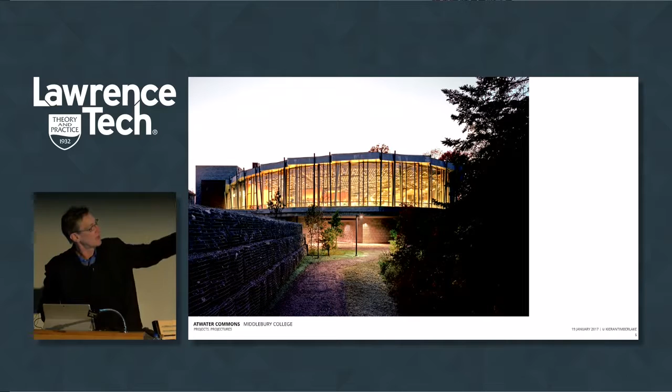For instance, this dining hall, this collective of two residence halls and a dining hall at Middlebury College, was formed around the question of how a new aesthetic can reinforce campus architectural traditions and frame views of the campus and the grandeur of the mountains. This dining hall sits on a podium, engaged in a hillside with the residence halls behind it, but sits almost like a tree house into the trees, looking at the mountains beyond. These gabion walls, wire cages filled with rock, are part of the excavation of nesting this building into the hillside. We took that rock and created a sound wall that is now ivy-grown and merged back into the landscape, adjacent to the building.

How can we conceive a residential complex that builds community while serving as a model for environmentally responsible student housing? This project at UCSD in San Diego, part of the University of California system, incorporates both natural ventilation and high building performance to achieve LEED Platinum housing on that campus.

And these hallways along the outside edge are outside. You can't do that in Michigan very well, but in California you can, and you can see the Pacific Ocean from some of those prospects.

And then when you get into the rooms, the rooms are loft-like, they're adaptable, and they have abundant natural light and are knitted both to the campus and to the landscape.

At Cornell, one of the questions was, how can architecture unite academic and residential life? There are a series of finger-like buildings that travel down the hillside, allowing the landscape to move through the buildings.

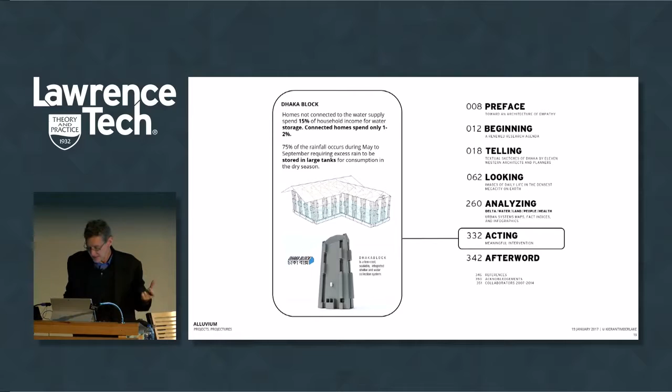And the other critical fact is that half the time of the year, half of Bangladesh is underwater, either from the north, from the alluvial flow coming down from the mountains and the snow melt, or from tidal flow from cyclones being pushed up the Bay of Bengal, flooding the lower half of the country. So there's constant turmoil of where one lives and how one lives, intense poverty.

And a country that, like India, like some of the other sub-Asian continent countries, were agrarian societies that are becoming urbanized. So you go 3 hours outside of Dhaka and you see these kinds of rice fields, and you wouldn't think there would be 165 million people in a country like this, because there are acres and acres of land and you only see 5 or 6 people in the middle of the rice paddies.

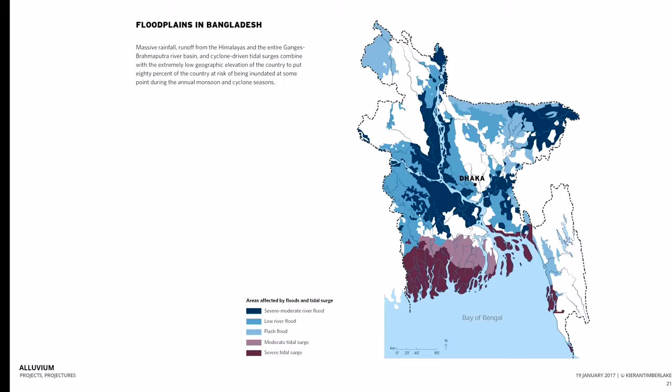But here are the floodplains of Bangladesh. The alluvial flow from the north, the cyclonic activity coming up from the south, putting 150 to 165 million people at risk all the time.

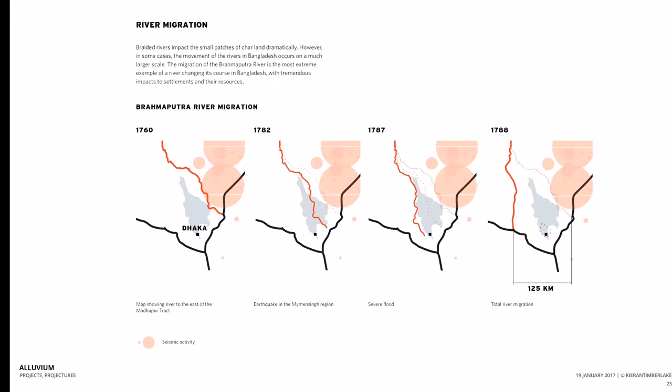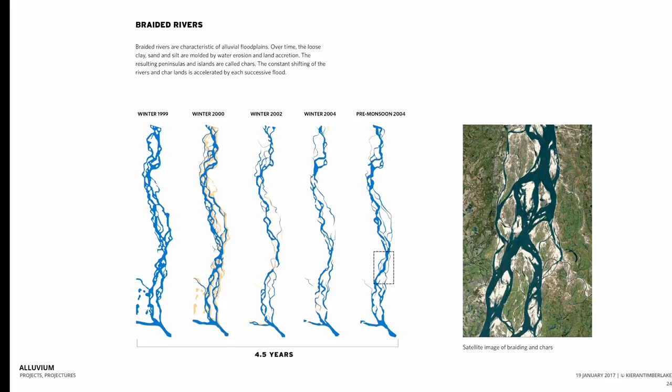It's a country knit by rivers, and rivers that are actively moving because of the alluvial flow. The rivers have actually transformed and shifted and migrated over time. So here's some of our research just chronicling the Brahmaputra River migration from 1760 over a period of time, moving 125 kilometers in a very short period of time, and moving back and forth. They braid, so in winter of 1999 versus pre-monsoon of 2004, you can see these widely shift in terms of their activity and where they're located within that common river valley.

What they create with that alluvial flow is moving tons and tons of sand and silt. So here's a picture of the Brahmaputra that is also fed by a bit of the Ganges and other rivers as well. What you're seeing in the distance, and we crossed over to that, is what's called a char. And that char is in about its 5th or 6th year. So all of that silt and sand didn't exist there 5 years prior to this photograph.

It's slowly been built up over time. And the average length of a char is somewhere between 9 and 17 years. Eventually, that river is going to move through there again and move all of that off. But in the meantime, it becomes a place of life with houses and farms on it, and it becomes a place of farming as well.

The activity of all that movement of water and land causes great migration, as well as the desire to improve life and well-being. Unlike the United States, which has been tipping back and forth over the last 50 years, we're back into an urban migration.

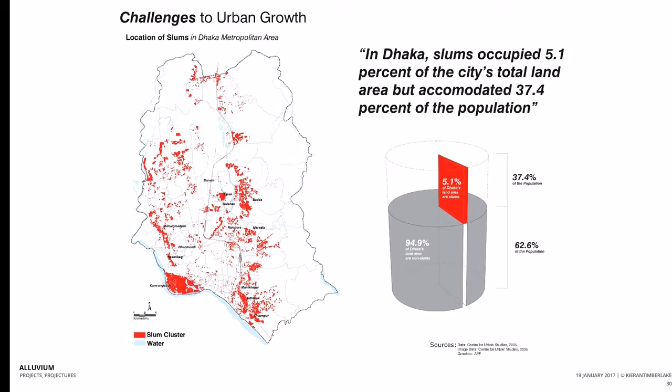Water is illegally tapped because fresh water is hard to come by. Some of the challenges to urban growth include not only the rural-to-urban migration and the increasing amounts of people in slum areas pocketed throughout the city, but trying to get goods and services to them, because they're part of the informal economy—the bicycle taxi drivers and so forth.

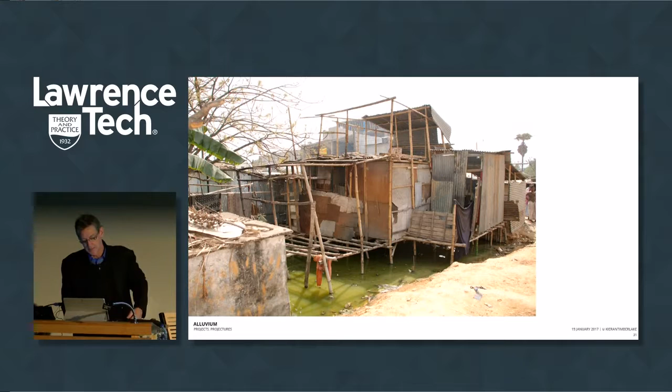But this is the kind of places that they live: informal housing, built at the fringes, built of scraps, bamboo structure, CI sheet, found objects, and so forth—enough to keep the water out, enough to provide shelter from most of the elements, but at great risk from flooding, disease, and other things.

Bangladesh, like India and some of the other sub-Asian continent countries, has a lot of brick-producing facilities. India's gotten some of these under control, as have some of the other more developed nations. But a lot of these kinds of things come to these sub-economies because, for instance, after World War II, Japan became the garment industry. That moved to China, then got shoved down to Vietnam, over to Myanmar, Thailand, and Malaysia. And now the garment industry is in Bangladesh.

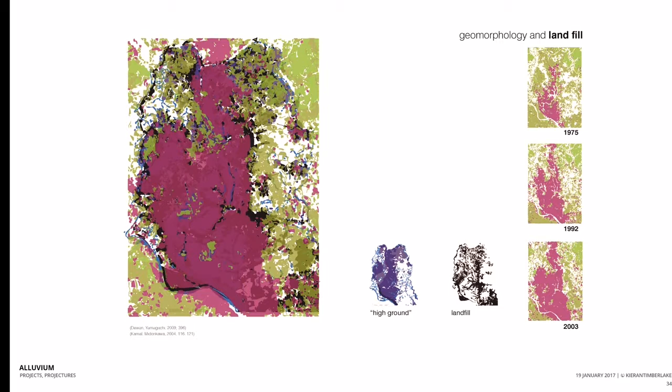Meanwhile, they attempt to create more land—there's a lot of land hoarding and gathering. This map analyzes how much land has been raised and filled since 1975. What they do is pump sand out of the river; there are pipes running all over the groundscape, raising the land—dig, elevate, dwell—trying to raise the land relative to the water table over the clay cap. But what happens is that floods move that refilled land, making it more alluvial, which creates more flooding issues and more problems.

Here's a sand scow moving that sand from the river where they dredged it downstream. Here's some of that sand that's been moved, now being pushed around in order to make one of the new highways reaching out toward the northeast out of Dhaka. So how does Dhaka grow in the future?

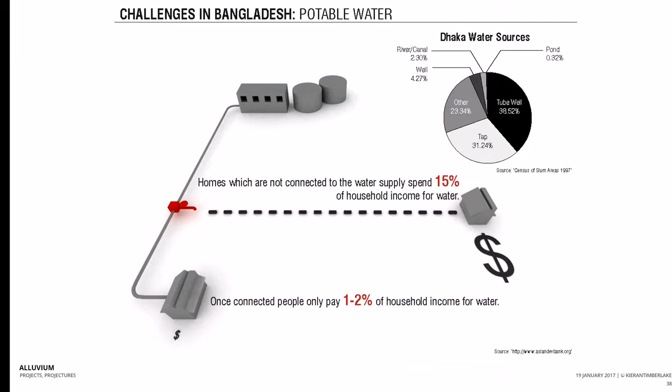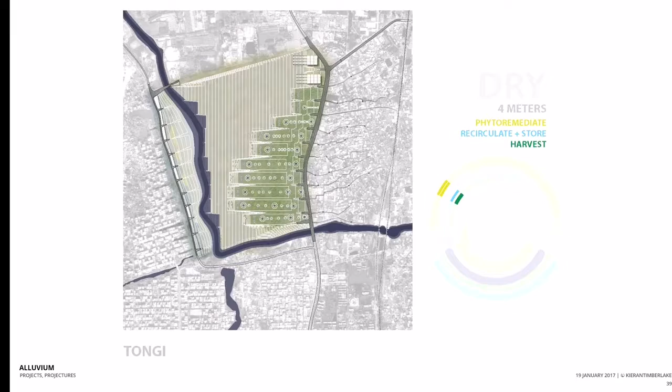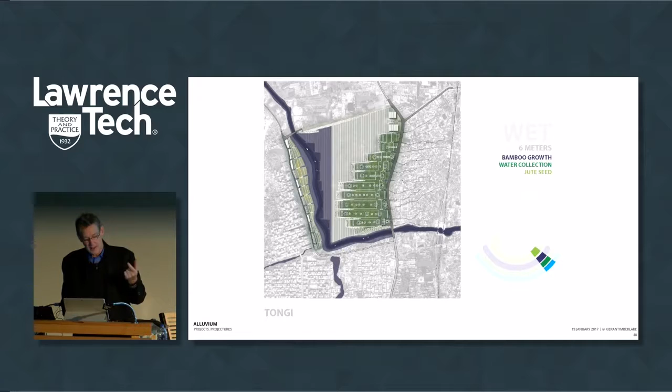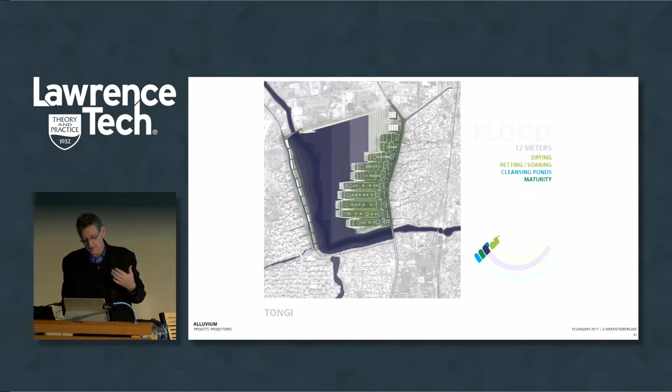So we've studied the water problems and how those might be remedied as architects. We've taken properties in Dhaka and looked at how they might be utilized over the course of the dry season, the wet season, how flooding might inform making the use of the land more purposeful, how that might be utilized during different times of the season when they have to have events on this particular property. And how those synergies of land use might come together for local neighborhood consumption.

These are the kinds of things that we've done with our architecture students, and then used them to go to the local politicians and government and share these ideas with them.

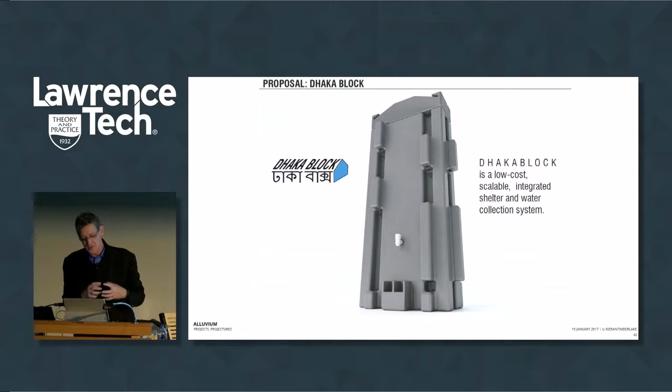This Dhaka Block was an idea of taking the Jersey barrier - something that was made out of concrete, but now is made out of plastic and hydroformed, usually filled with water to create those temporary barriers around construction sites - and reimagining that block as something that could be molded into a way of storing potable water, gathering rain, storing that water, filtrating it, but having it become a building block to create low-income or middle-income housing in Dhaka. With temporary sheet and other kinds of things it could become a shelter, but form throughout the seasons, wet and dry, a continuous form of water that isn't full of arsenic and some of the other things that they're getting from the groundwater.

Kahn understood Dhaka, and I just share this with you because Louis Kahn was somebody that, when I went off after being at UDM, went off to the University of Pennsylvania - he died the day I got accepted there. People, I think this guy probably said he knew you were coming.

But this was a famous architect that really understood landscape, environment, building within that, and creating something iconic that really was about the nature of those people in Dhaka. And I thought I'd never get to see this iconic building. I'm sharing a little bit of it with you today because I thought I'd never get to see it in all the times I've been living. And now I've seen it six times - I've been through this building six times.

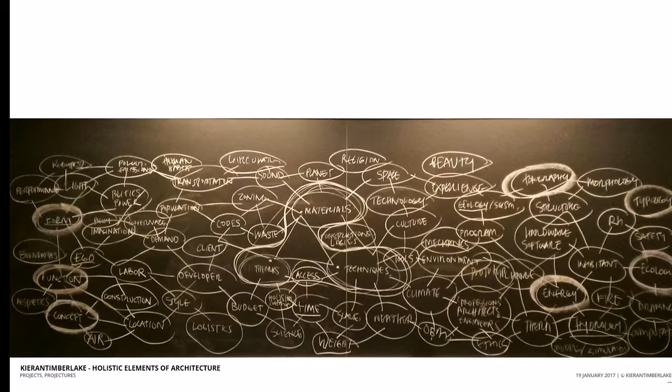Ego, concept, logistics, money, light. One of the things that going through architecture school, as it was conveyed to us very early on, is that it was only about a couple of things, and if you could solve those couple of things, you were doing pretty well. Well, getting out into practice and teaching, what we found is that it really is hundreds of things, and they all needed to be solved - and solved holistically, not out of balance. Otherwise, you end up with messes of buildings that don't work, that people can't support, that cost a lot of money, and probably aren't very beautiful either, even though you were trying to solve for that.

How do we do that? Well, we work collaboratively, we work interdisciplinarily. We bought a building that's an old bottling plant in Philadelphia that had closed in 1988. It had a variety of other uses in it. This is sort of the arc of the day on the second floor.

This is where the bottles were brought up and washed, then filled, and then taken back downstairs to the cooler room or back out to the loading dock.

Everybody is on wheels in this particular space. There are no partners' offices, we're all out in the open. Even the conference room walls can be moved. It's incredibly mutable, agile, and nimble. So over the course of when projects finish, people can just unplug their desk, take their phone, their computer, and their gear, and re-plug into another team where they've been reassigned.

What you're seeing is the light of the day move through that space, through the central skylight, and across the floor. We raised the floor, created two active air highways in that particular space, and put the data and the power underneath the floor.

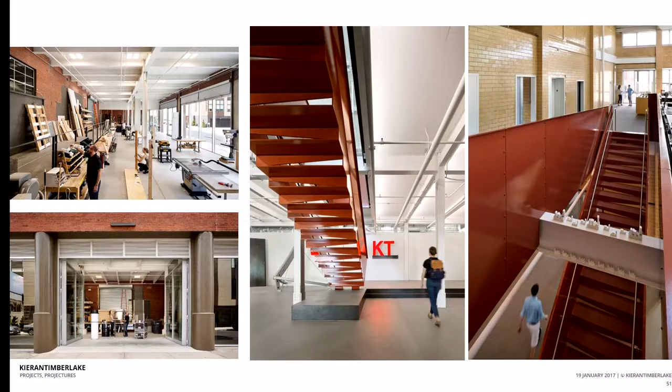On the lower level, you're looking into our shop, which we put out in the front street because we make things as architects. We want people to understand that the craft of what we do is still something that's of worth, and it's not something to be hidden.

This is a making neighborhood, or it used to be a making neighborhood with three breweries, shipbuilding, and other kinds of craftsmen. It's now full of millennials and others and a lot of housing. But having a making space on the lower level, right out on the street, we thought was a gift back to the neighborhood, and it could be opened up.

We arrived via that lower level via a stair that was offsite produced by We Design by Zahner out of Kansas City and shipped in. And here is the bottling plant, and here's the new plant over there on the right.

This space was designed to be naturally ventilated, because there was lots of steam, lots of water, lots of energy being expended by the machines. When you clean that out and go to a lighter, less intensive use, in some ways a different intensity of use, there's a different kind of energy going on. But we wanted to retain the natural ventilation of this particular space, which we do. The windows open, the skylights open, and there are exhaust fans on either end.

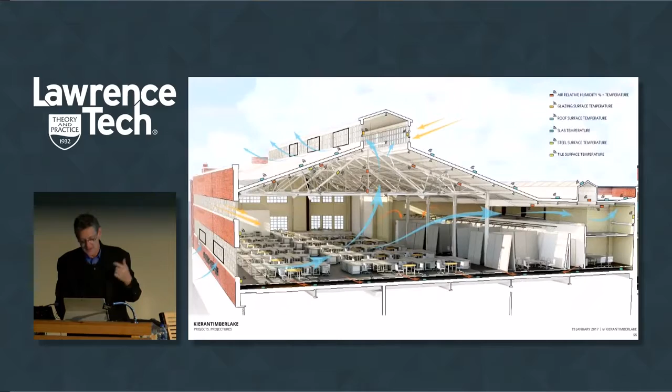Our research spaces are throughout. This is a diagram of how that was analyzed and how all of that works, and the abundant natural light that we can get into that particular space.

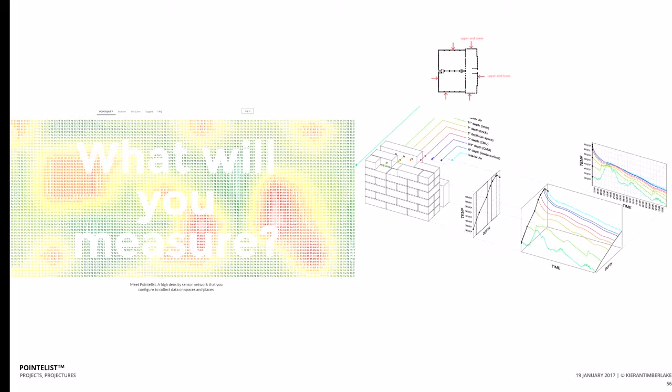We deployed a wireless sensor network that we invented, which is now branded Pointelist, that we're trying to commercialize. We can place it out of the wall, in the middle of the wall, on the inside of the space, in a variety of areas with microsensors that have the ability to go back to an app we've developed, which can show up on my iPhone or somebody else's iPhone. This is the iteration of all of those sensors.

Then we take that data and get a variety of readings from it, dryness of air, humidity, temperature, latent outdoor temperature. So we have a variety of cycles that we've been able to map that inform the building management system and allow us to run this building efficiently. We also modeled some of the employment of the choices of materials in this particular space.

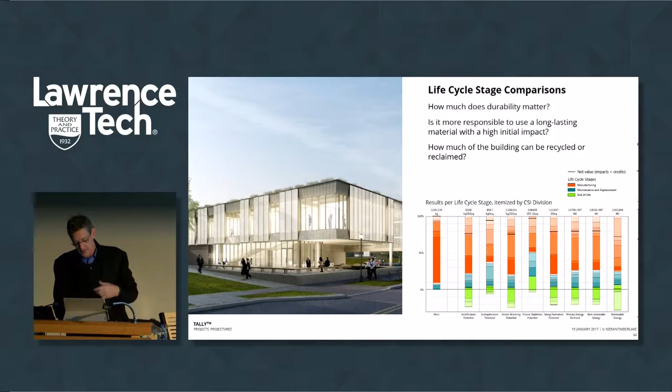We do this with all our buildings through a software that we've designed and invented, a plug-in to Autodesk Revit called Tally. So we're software engineers, we invent products, we research materials. We are deeply invested in understanding the life cycles of buildings and how they inform our choices, and then we investigate the materialities of those efforts.

These are mock-ups you see on our lower level in Ortlieb's. The upper level is the big room above, with mock-ups we've done for buildings we've designed: the wood wall system at the University of Washington, mock-ups of concrete we poured in the shop. We can weld, we can form different things.

We have a 5-axis milling machine, so that screen you see for UCSB that would ultimately be cast out of GFRC or GFRP is milled out of foam as an initial prototype to show the client, so that we can fail early and fail fast.

That's really been one of the issues for architects and designers, even in the auto industry — we're all building prototypes. The very first building we build is a prototype. Well, how do you get out of building your very first building as a prototype? Or the second, or the third? You have to fail early and fail fast, and the only way to do that is to start mocking this stuff up and getting it out of drawing information sooner.

So by mocking up these materials and casting those things, we're able to do that and understand them.

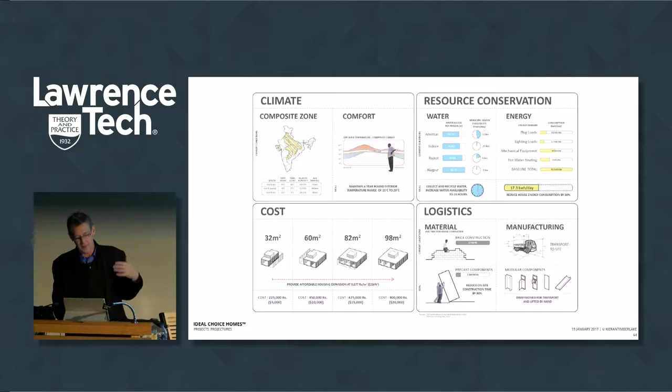This early phase of the project was understanding the climate zones in 10 different climate zones, 10 Tier 2 and Tier 3 cities, the resource consumption of buildings of this sort, the logistics of building them and getting them there and making them, and the cost modeling for everything from a very small 32 square meter single-story studio all the way up to a 98 square meter, about 900 square foot house.

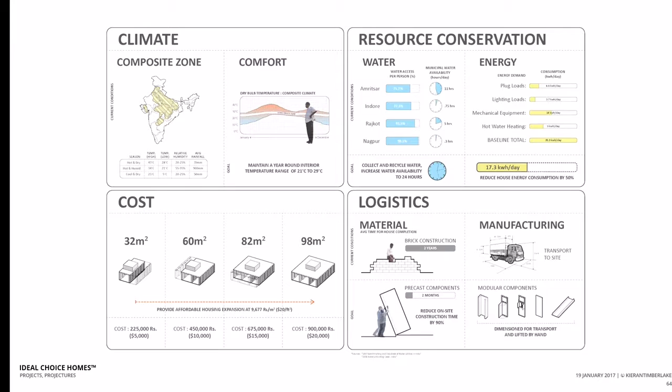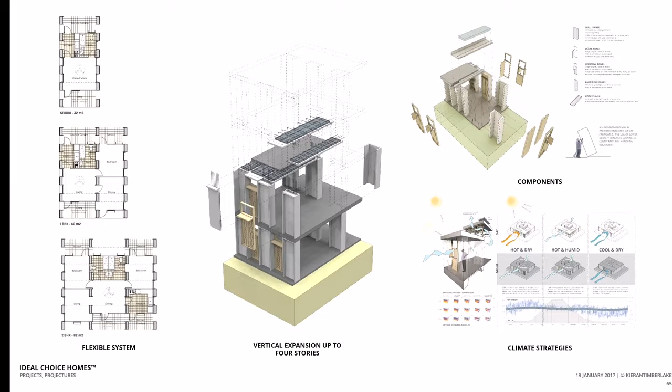Since then we've taken this, as you saw in the earlier images, to a G+1, ground+1, or ground+2, or ground+3 models, and we're looking even further than that. We developed a series of system elements that create enough mass so they are both self-shading and self-ventilating, with infill pieces that create a variety of mass-customizable, mass-produced models that we're pursuing around India, studying their environmental impact and how they perform throughout the day, and then how logistically they might be assembled.

So in order to fail early and fail fast, we invited Amber and some of his partners back to Philadelphia very early on, and in our early shop mocked up some of the elements out of cardboard first at scale to show them the scale of what we were doing.

See, I'm never too far away from Detroit — I even collect old used car signs as well.

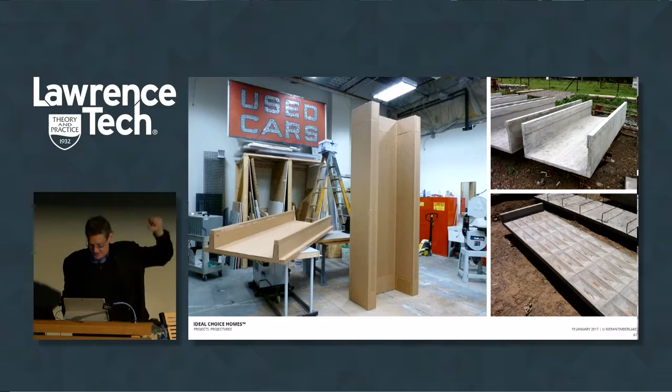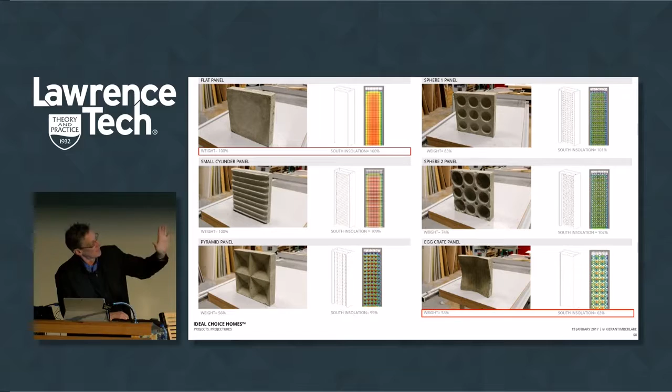We began to test out concrete sampling and dimpling for the exterior walls of this. What you're looking at here are different means of three-dimensionally forming the outside wall of the columns of the building, which form the mass of the overall house.

And then modeling through a variety of softwares — I think this is Ecotect in this particular case, but a variety of other softwares we've employed as well — which demonstrates that a flat panel is the most absorbent of not only some of the insolation factors, but some of the direct energy from sun passing around throughout the day. But as we begin to shape the face of that flat surface, we begin to deflect some of that energy immediately throughout the day, so we're taking some of that incident solar and reducing the impact on that element right from the get-go.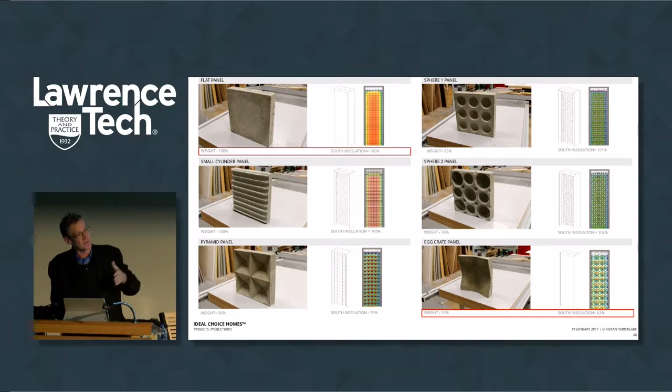We've created both pocketed windows and dimpled walls that allow us to modulate energy, creating a time lag before it's brought through the house, from outside the wall to inside. Some nights in India can be very cool, particularly in the shoulder season, so we want some energy to reach the wall, but not all of it to get into the house—some of it should be dissipated.

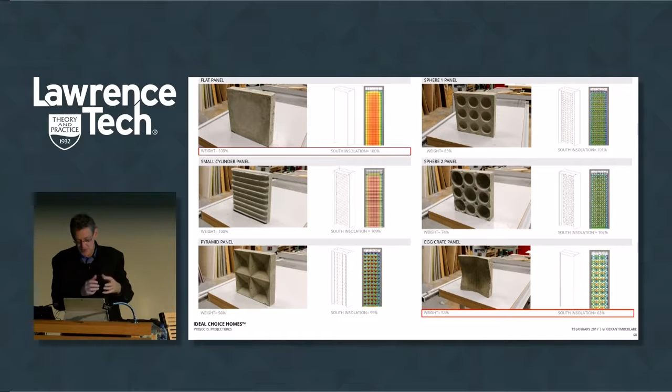We tried different elements to form that concave shape, looking at it from an economic point of view, and then in Ahmedabad we did our first prototype. What you're seeing is the C-shaped columns with a dimpled infill panel, and an infill wall and window setup—this is not the house itself, just a piece of it.

What we're trying to do is understand how the slabs and columns come together to create a moment connection, and how difficult it was for men to lift them without a crane. In those early days we imagined we wouldn't have a crane on site, but now we do, and we've expanded this prototype to a second effort.

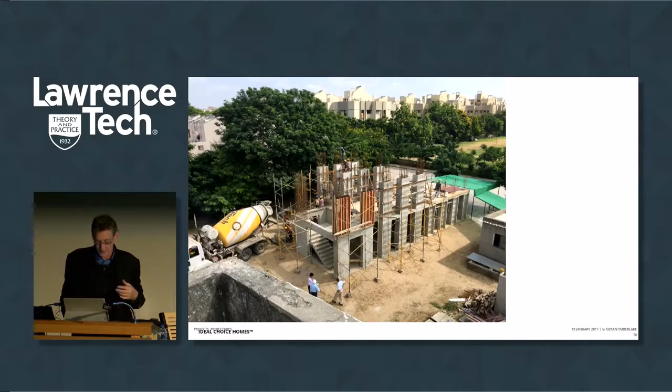This is expanding the prototype and looking at improvements. On the lower story you can see the old prototype to the right and the new prototype about halfway down to the left—notice how those C-shaped panels have been turned around, because we've been learning from design-for-manufacture with the local precaster and our other Indian partners.

We continued looking at shaping materials for other projects as well, and we've employed this strategy on a variety of other projects.

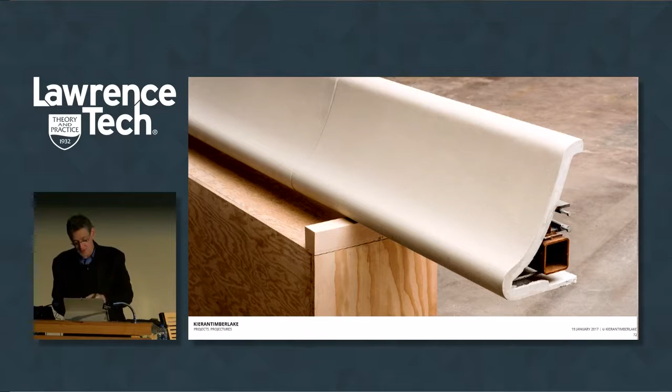For instance, this is a shading fin that went through six iterations and is now deployed on Brown University's new science building—a GFRC shaped fin. You can see the structural steel tube that reinforces it, allowing it to clip onto the facade.

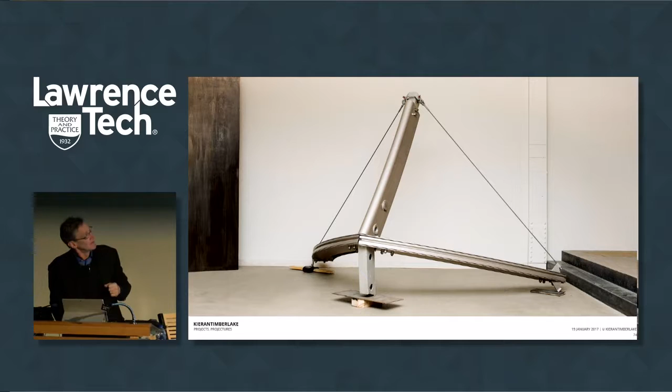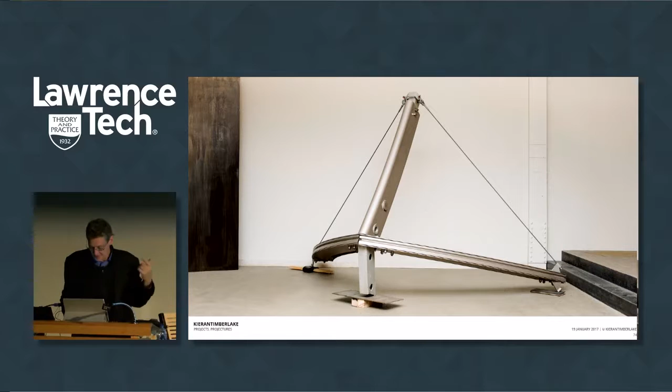I already spoke of the UCSB screen earlier as I walked you through that lower level. The struts for the embassy, shown in that very first slide, the New London Embassy—one of these sits in our lobby, about 11 feet high and 11 feet side to side, in that kind of bowsprit shape. This is the lower half of that assembly, and you'll see more of it in a moment, looking up the facade.

I'm going to talk a little about the embassy. We work overseas—in India, Singapore, Malaysia—and we continue to look for opportunities globally. This was a commitment we won by competition in 2010, competing against Pei Cobb Freed, Richard Meier and Partners, and Morphosis. We're all still good friends, but we were the winners, chosen by an international jury comprised of American and UK jurors.

I'll take you through the embassy. This is a view we did during the competition phase—a typical London day, post-rain, with a wet street and an active sky, a kind of reflective near-dusk wall.

This is the site near Vauxhall. Down here next to the bridge is the MI6 headquarters, which was blown up in the last Bond movie. And there's Battersea Power Station, where Pink Floyd did some of their rock concerts—now all being surrounded by housing. This whole area is the largest area to go under construction in London, and it's all a catalyst because of the U.S. Embassy's decision to move from Mayfair and Grosvenor Square to this site.

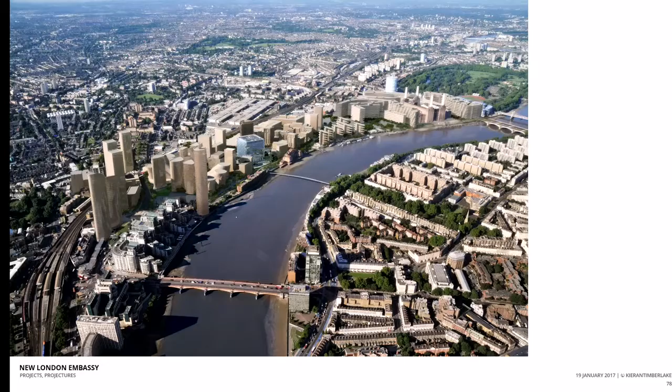For those who think we have too much government involved—this is actually a real estate deal. No tax dollars are going to this project, to that cube. Back in 1960, the U.S. government invested in Mayfair, which is now some of the most expensive property in London and the world. They were able to sell that old London Embassy property, which you'll see in a few minutes, and use the proceeds to pay for our fees, for this building, for the fit-out, and for the site itself.

And so that's how this building is getting paid for. This is what this is going to look like in about 2025 with all these new high rises. About half of this is already finished or under construction. There will be roughly 25 to 35,000 new housing units in this post-industrial area near New Covent Garden Market.

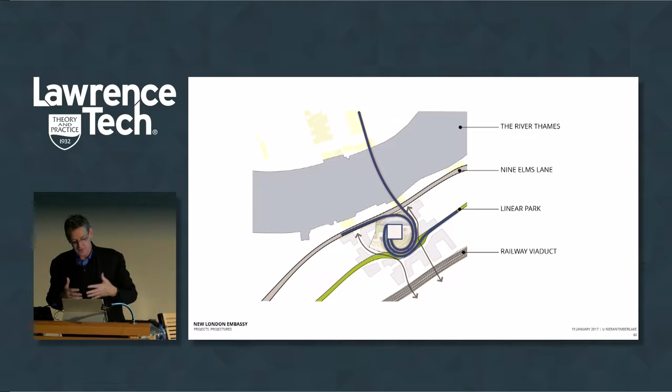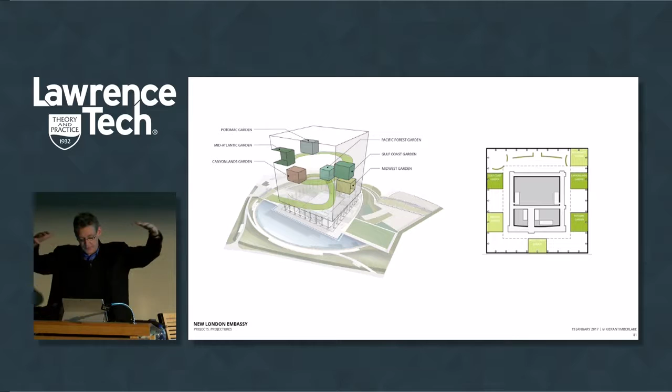So we studied a variety of shapes, and I'll come back to that in a minute. But we wanted to knit this into the landscape. On that 4.5-acre site, we created a pond, which is part of a public park, accessible to people and not walled off from anybody. We hid the security elements of the landscape and of the building into the building itself.

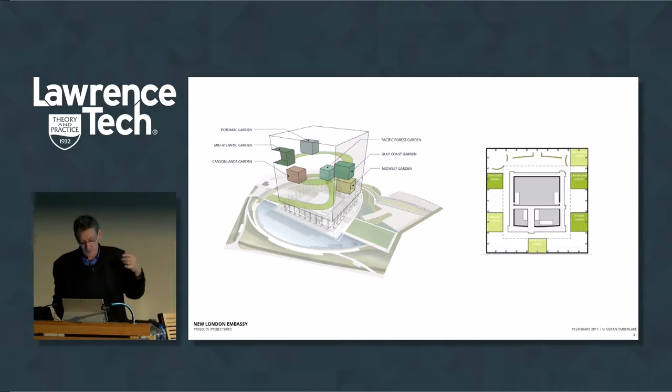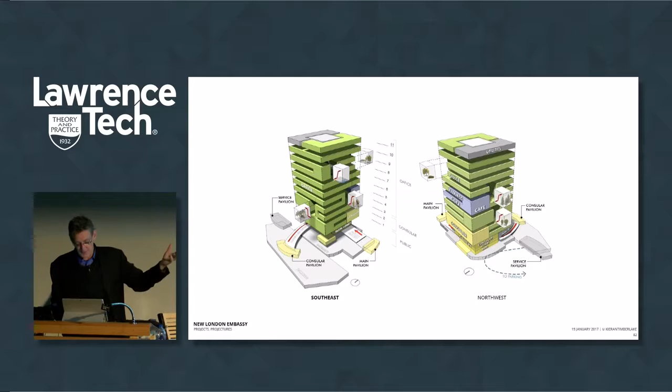Created a series of entrance pavilions around the outside, and then wound that landscape up through the building into 6 gardens that are carried up through the building and plugged into different spaces. So it's essentially an office building with a couple of public lobbies, a couple of major public meeting spaces on the lower level, and a series of stairs that allow you to walk through the building and get from each of these 6 gardens up through the building.

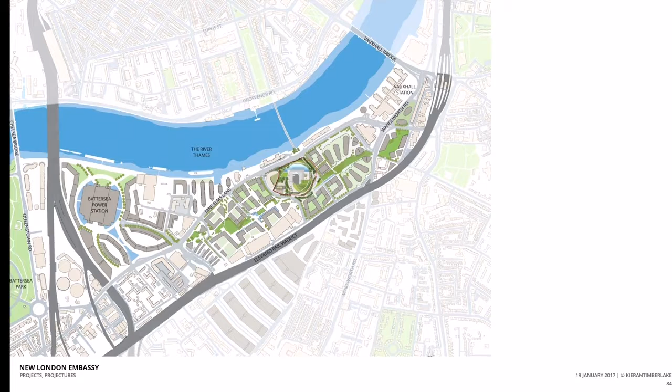So there's that linear park. There's all that housing going on. There's the embassy. That bridge going over to Pimlico is proposed, and they've bonded for that, and eventually in the next couple of years that will be built, so there will be a direct pedestrian linkage from Victoria and Pimlico over to this particular site.

The site itself, as I noted before, is surrounded by new buildings, which we couldn't anticipate the design of at the time, mixed use, housing, commercial, and then a series of what are called CACs, or entrance pavilions: the main one to the upper right, the consular pavilion to the lower middle, and the service pavilion to the lower left, which allow you access through screening to the site.

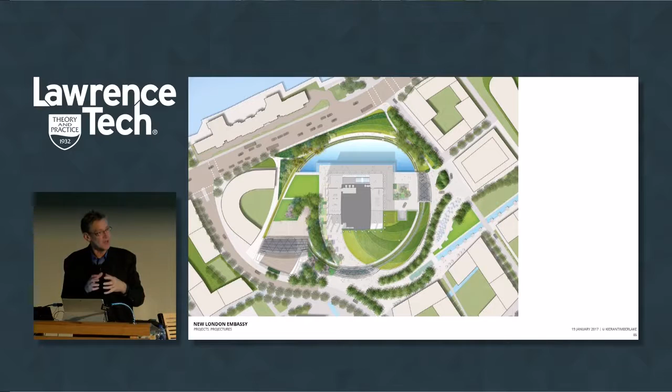Major consular walk up through a garden into the consular lobby, and then a building that's oriented north, south, east, west with a very compact cube shape that is the most efficient form for environmental impact, both on the city and on the energy consumption of the building.

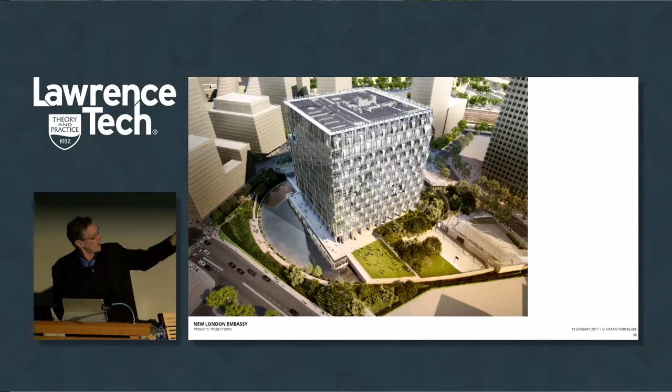So this is kind of a drone view, if you will, of the pond and the walk and the outside event gardens, a view in landscape. And you'll see some of this under construction just at the major formal lobby.

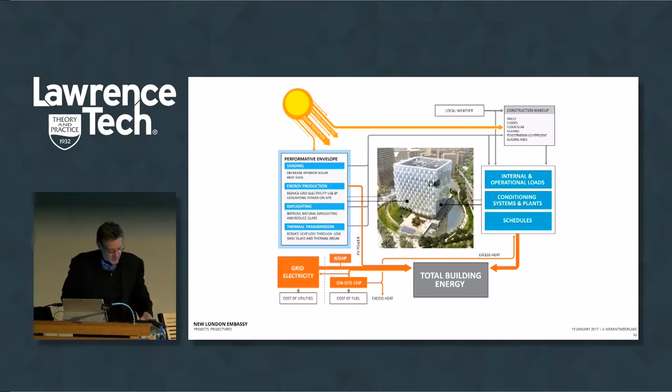And so you can imagine you're spending all this money. I talked a little bit about holistically designing buildings. You're spending all this money and you want a building that's a 50 to 100-year building at least before you have to renovate it, that is energy efficient, really thoughtfully thought through relative to life cycle use and so forth. So we worked with our engineers, Arup, to think holistically about the total building energy being consumed here, and that ultimately we might be able to do without.

So we're gathering some from the sun. We have some ground source heating. We have rainwater harvesting, daylighting, other energy production systems. We're getting some grid energy in. We're producing some of our own, but with the air changes per hour and the operational loads and schedules and all of that, we have a sum total of building energy that we use.

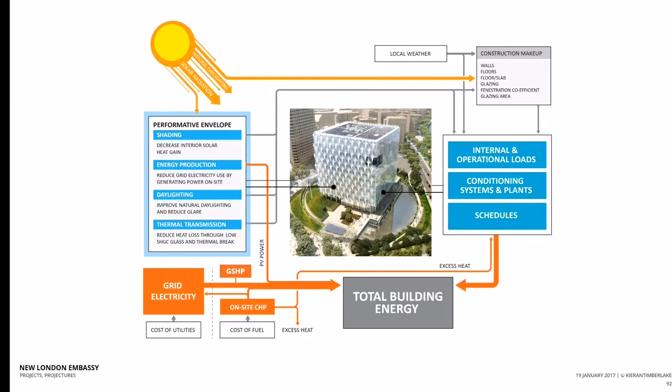But one of the things that isn't shown in this diagram is the fact that this building ultimately can be a district energy exporter eventually, within the next couple of years, once they get the system of other buildings linked up to it over time. One of the ways that we're managing that energy is through that outer envelope.

It's a very secure inner envelope, which allows us to get abundant natural daylight, and the layups for that glass are classified, but something that Kieran Timberlake worked out with the Department of State. And then the outer envelope is ETFE.

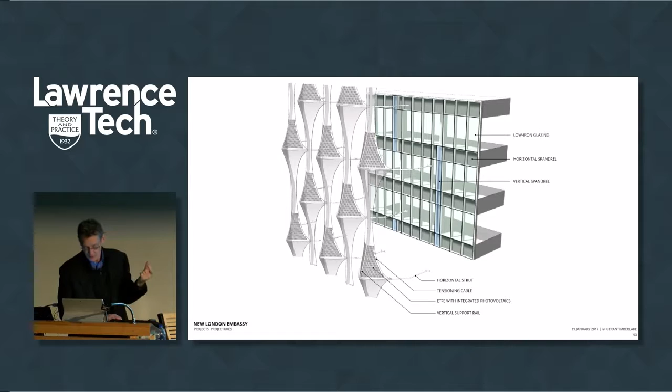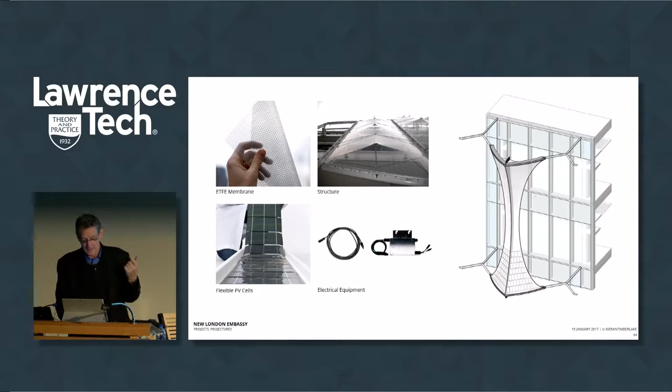Which is anticipated to have solar panels integrated behind it. A mock-up was created, and then we've gone through a series of fail early, fail fast iterations on that, but I'm going to take you through the construction of this building.

This is the site just under construction, and the core coming out of the ground. This is about 2014 when the steel started going up.

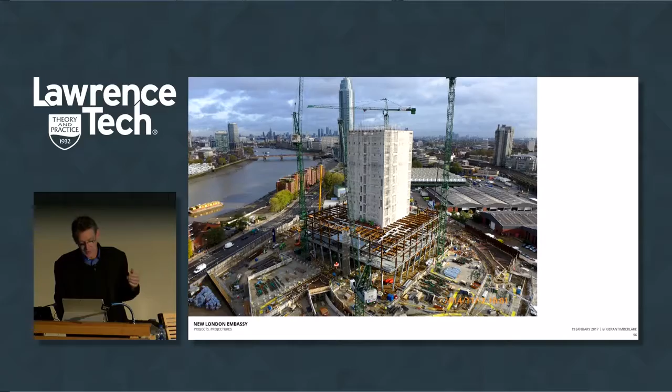You're looking up London, and then the steel up and topped out, and the glass curtain wall going up. And then the ETFE and the outer struts starting to be put on the building. A detail of that — this was about 9 months ago.

Most of that ETFE is up, and you can see how the light now begins to transform, taking these shading devices and transforming the light both in and out of the building. Some views from Nine Elms Lane, out far with lights on, now starting to merge into the building, and the lighting conditions on that outer layer.

That's shaped and formed through a year's worth of iteration, trying to discern the most efficient shape to maximize shading on the building, but also create an aperture for view out of the building that was syncopated with that particular element.

Different views of that — you can see some of the other housing going up. So this is an aluminum and cast outer structure that's attached to the curtain wall, that the ETFE is then stretched over the top of.

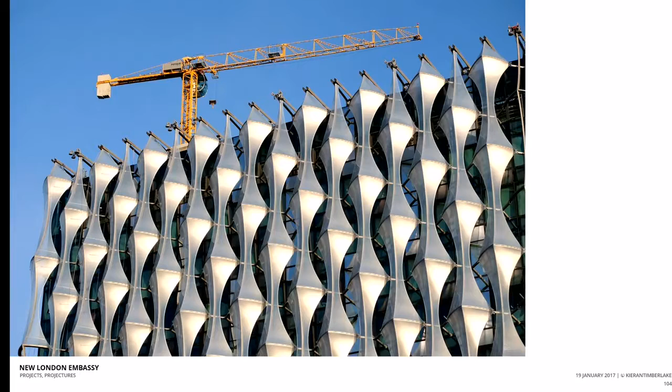And it's wrapped on three sides, the east, south, and west sides. The north side facing out to London is kept open, and there's another view here. And then a view just up the river in context, a dusk shot, and the kind of southeast view.

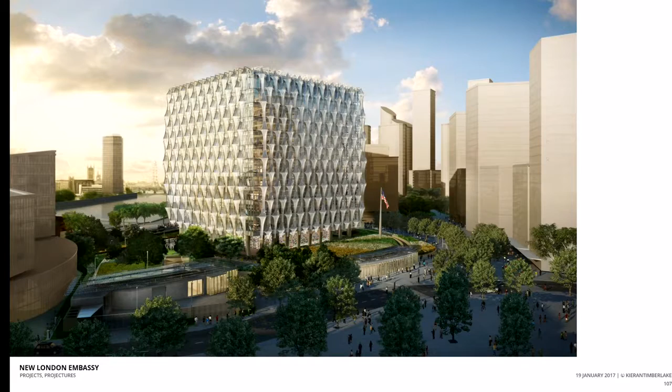So the building is now vacated and has been sold and is being turned into a hotel. We were approached by the developers, since we knew something about the building, to compete against Foster's and Chipperfield and one other firm in London to discern what we could do, both as a hotel and as apartment condominiums, to convert this building while maintaining its best characteristics.

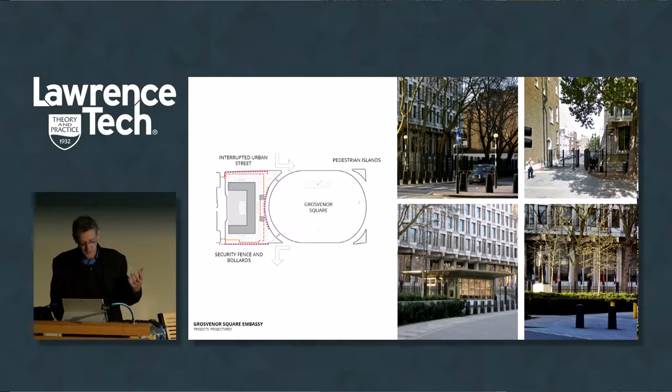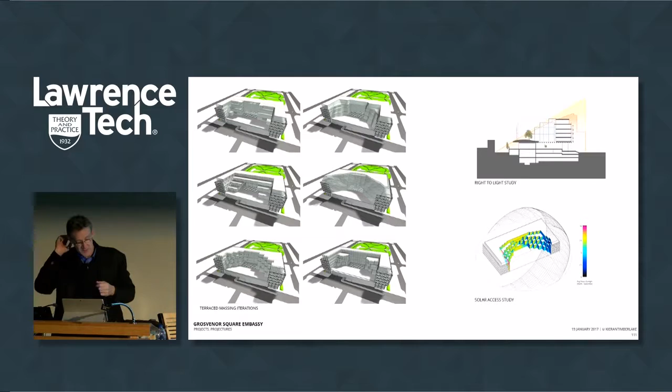And so we did the usual analysis of the existing conditions. This is a kind of view of our scheme, which I'll come back to in just a minute. We went through a series of modeling studies of how to maintain the profile of this building and not interrupt the view sheds, while maximizing the addition of some program, both for housing and hotel.

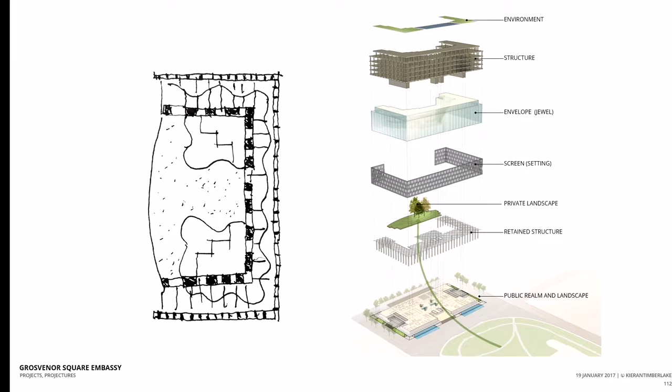And came up with a scheme that allowed us to basically put the hotel out to the public face, out to the garden, out to the street, and turn the private housing into the inside, all by arrival at two different — essentially three different — lobbies: one on the north, one on the south, and one on the east. The hotel lobby is on the east off the park, and then the condominium lobbies off of either end.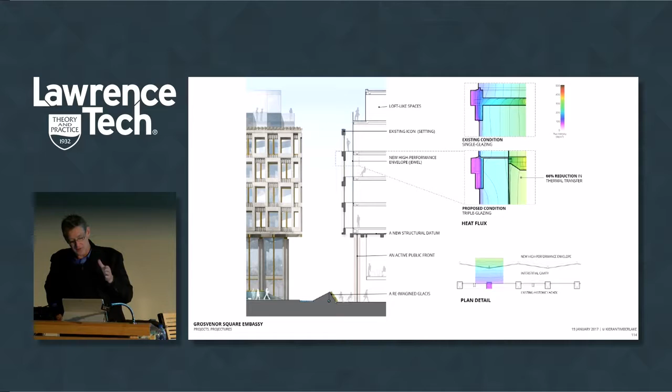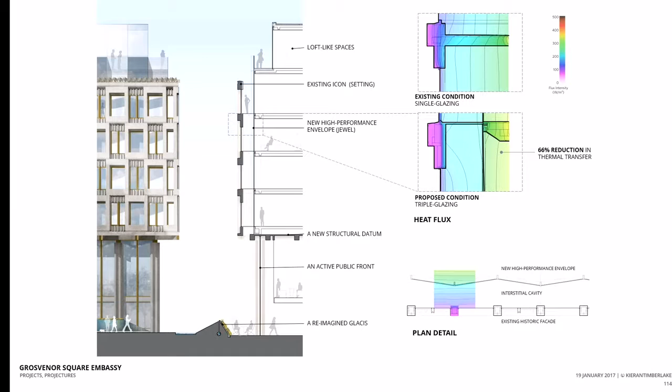Taking Saarinen's curtain wall facade, which was pretty cheap back in the day, we thought we'd have to reassemble it somehow but get energy efficiency out of it due to the energy laws in the UK. We imagined a double skin facade: an inner acoustical layer, an outer layer that would allow us to modulate the energy coming in from the exposures on that particular side, through Saarinen's facade, through careful analysis.

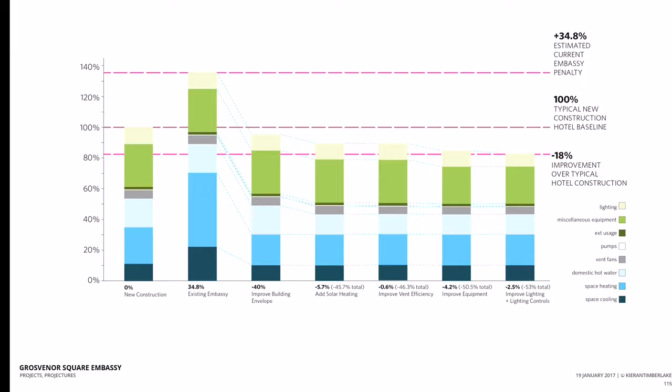There was roughly a 35% estimated current energy penalty on that particular building because of the way the energy currently worked. The new construction hotel baseline reduced that to near zero. We took it through a series of stair steps to see that we could make an improvement over typical hotel construction in London, which expects buildings to be high performers in a very creative way.

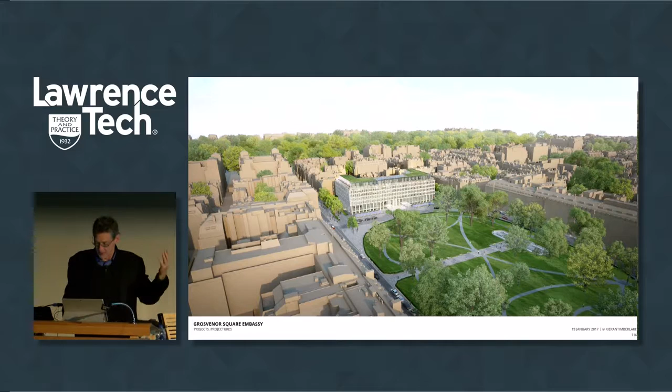Here's a rendering from the park, looking at that scheme with a new green roof and the condominiums, with the extra story set back but added around the top layer because that height was already there, but it was a mechanical space. Now we could make it into high-end apartments as well. The ground floor becomes the public hotel lobby and event spaces, but maintaining those elements, and you'll see views of that in just a minute.

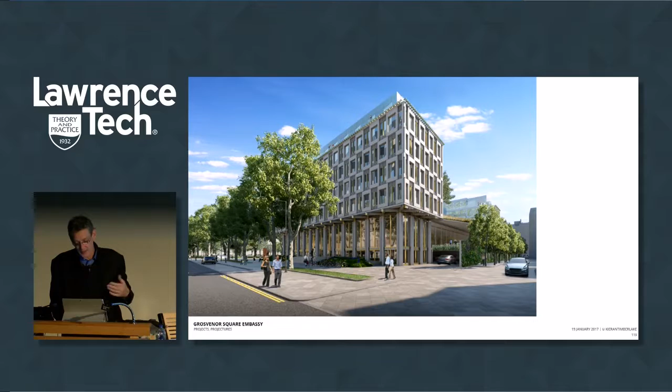This glass cube sits down behind Saarinen's screen-like facade, allowing it to maintain its best characteristics, but opening the street up and removing all the security accoutrements from each side of the building, thereby knitting it back into the landscape, maintaining the lobby.

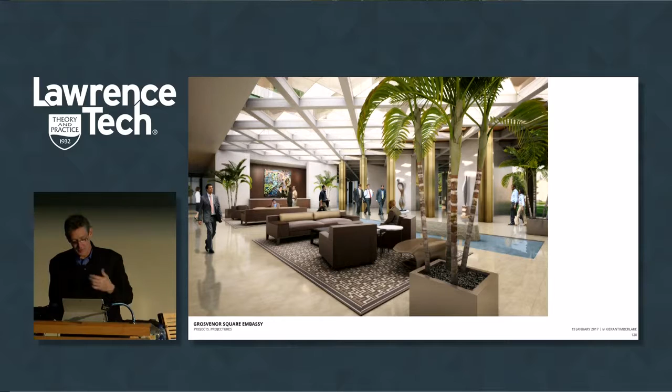If you've ever been in this lobby, you know there's a pool that was intended by Saarinen, which was then covered up after a diplomat fell backwards into it during an event. So they paved it over, but it still exists there, and that obviously gets opened up, becoming very much part of making a hotel lobby.

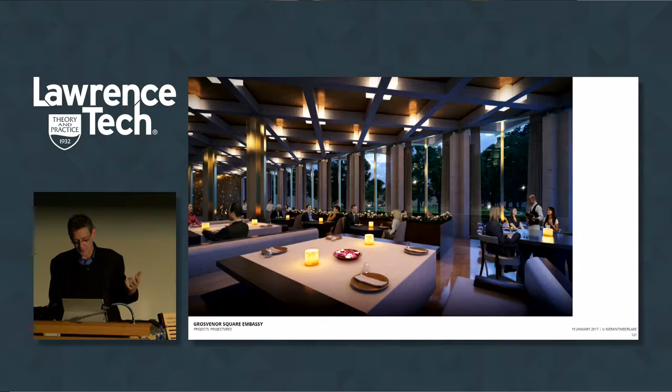These are all our renderings: looking out onto the park from the restaurant, one of the hotel rooms, then one of the condominiums looking on the back side, and a view on this other side.

Needless to say, we lost to the British—Chipperfield beat us. If I had to lose to somebody, I'm okay losing to him. He's a pretty damn good architect.

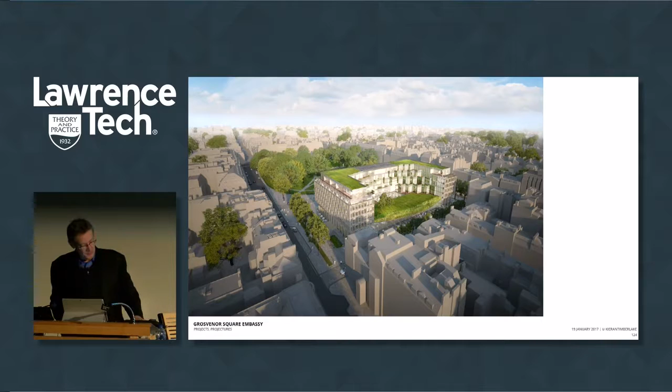The very last project I want to show is a house that we completed in New York that has been widely awarded and widely published: the Pound Ridge House, a Revolutionary War site.

This is where Revolutionary War troops, both American and British, traipsed over this property. You'll see in just a moment what it looks like on the ground. It's a third growth forest with rock outcroppings coming out of it, and these rock outcroppings are monumental.

The owner, a businessman in New York, and his wife collect art, have two sons now out of the house, and have a music interest. On the site, all this red represents the rock outcropping. So, where do you place a house in the context of those rock outcroppings?

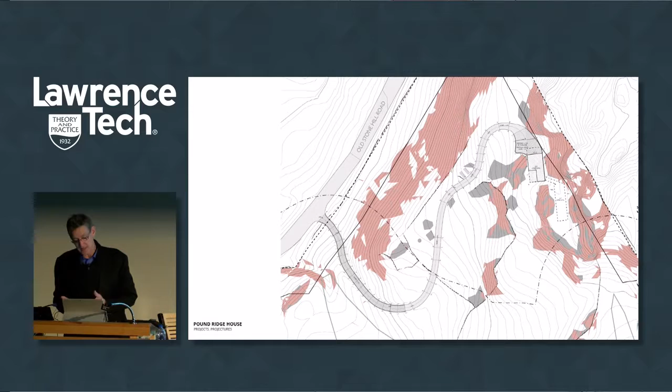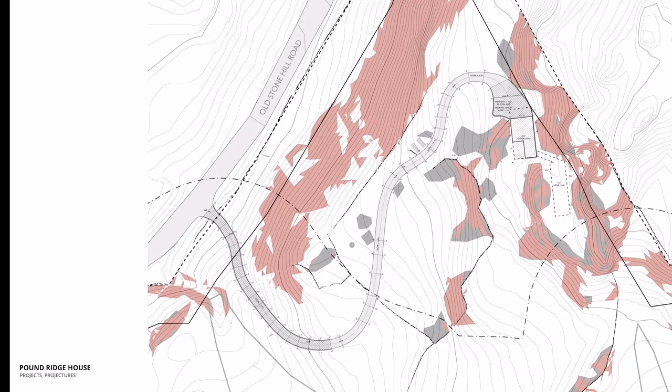I think what we chose to do was bring you through those rocks and up the hillside, then nest the house in amongst the rocks. But how do you do that without demeaning the rocks? How do you have this dialogue, this simultaneous discord or accord between something man-made and something tens of millions of years old?

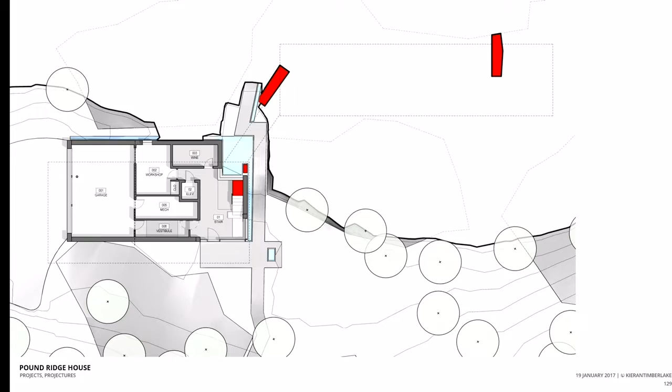So we slipped the lower level of the house, the garage and service pieces, and an entrance at that lower level off of a kind of forecourt, with a major stair coming up through the house. Then an upper level has a private suite of bedrooms and studies, and a public series of rooms set askance from that, connected by a bridge that goes out through the landscape.

The house sits perched up in amongst the rocks and becomes its own outcropping. This building was built through a series of skins clad in four different polishes of stainless steel, so you get that mirror-like imagery.

This is a view up in the rocks along that edge, and those panels are set in and out in order to dissipate some of the energy, but also to command 35-mile views—they're up on the top of the mountain here, the top of the hill.

There's this play of phenomenal and literal transparency. The literal transparency is the windows—obviously you can see in and out of them. The phenomenal transparency, per Slutzky and some of the Cornell theorists back in the 1960s, comes from the mirrored panels. A mirror is phenomenal transparency: you're seeing through something, but it's fictive. That's what the mirrored metal does here.

It's further modified by the different levels of polish that go around the house. So the stair—you enter that lower lobby of the building, and the stairs slowly build and bring you up to that initial level.

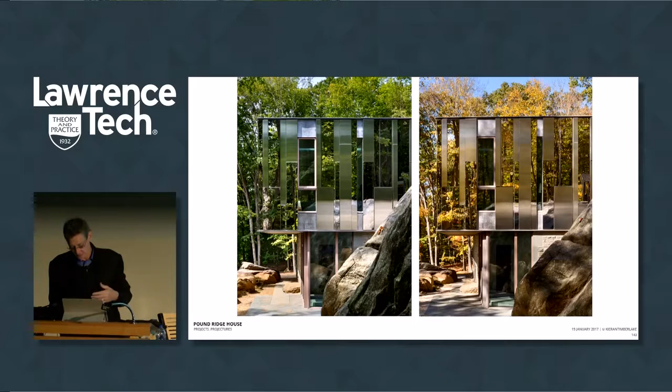And you begin to understand why young architects do some really interesting things, but aren't necessarily at their full level of craft until they've had a number of these buildings underneath their belt to really understand the dialogue that you can have with a site and a series of materials, light and weathering, that really transforms how you think about making something.

This comes with the same kinds of budgets that everybody looks at this stuff and says, oh, you've got a million dollar budget and all of that kind of stuff. We have budgets like every other architect. And we think of money and budgets and program just like it's part of a design act. So we work with very, very modest costs per square foot to make artful things. And it's through the choices and the engagement of an engaged client that you get those kinds of relationships. Yes, this house costs a little more than a normative house might on the fringes of Philadelphia.

But our office, and some of the other projects that you see, and the U.S. Embassy, have strict budgets that we haven't been able to go get more money for, whether you're operating on yourself or whether you're operating for the U.S. government as a client. These are things that are all part of the Design Act and become really, really important aspects of this. And I think oftentimes people look at this and say how beautiful this is - this house must have been several thousand dollars a square foot, and it wasn't. But it's just about careful thinking and careful design.